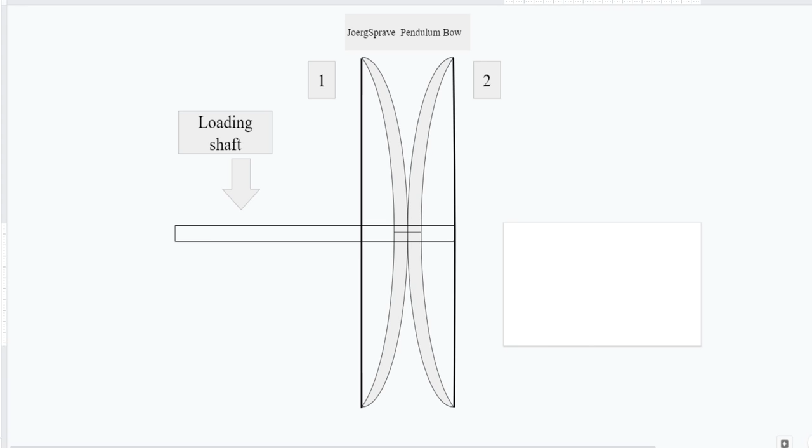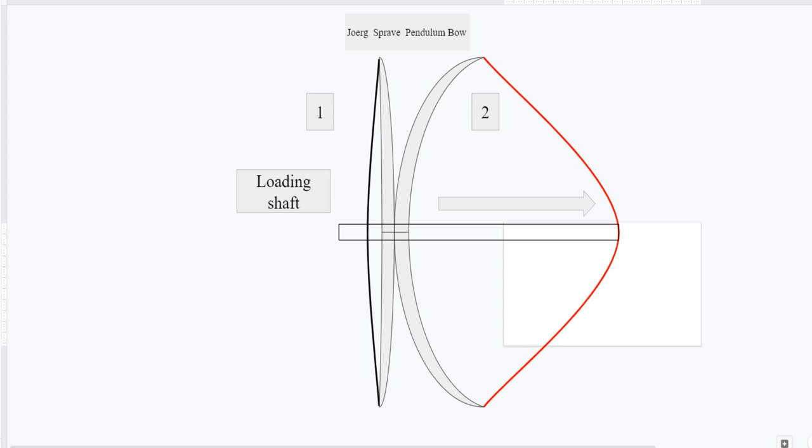Moving on, JoergSprave's pendulum bow is made up of two bows front to front, side by side, with a loading shaft extending backwards from bow 1. To load the bow, you must push the loading shaft forward, putting strain on bowstring 2, so you can be prepared for the pull back to get ready to launch an arrow. When you let go of the loading shaft, it should equalize. Both sides of the bow, 1 and 2, should equalize in force pushing inward.

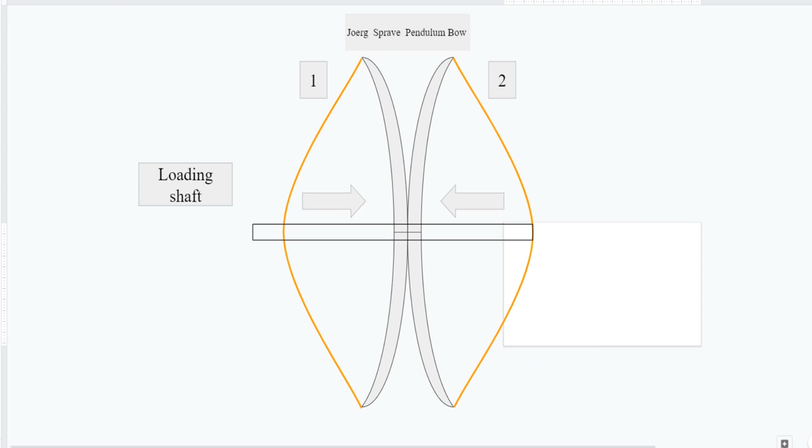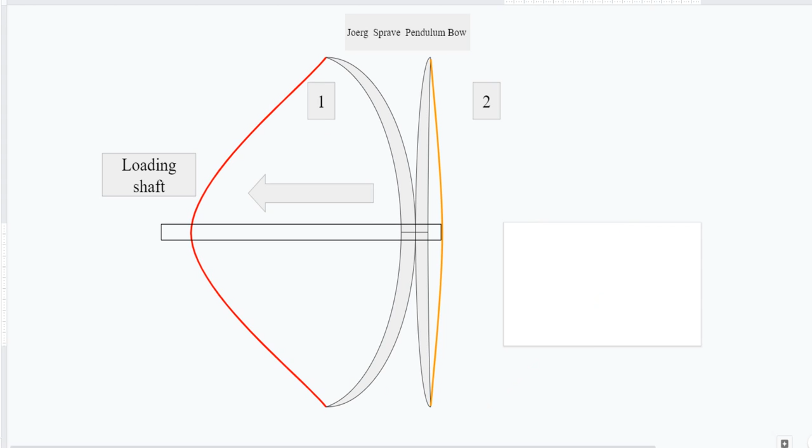So this way, it does not accidentally fire off an arrow. And this way you can relax your hand and wait for an opportunity to shoot an arrow. Now, you pull back the loading shaft on bow 1 so that way you can put strain on bowstring 1 to ready, aim and fire. Releasing the bowstring and the loading shaft should fire the arrow, and there'll be a trigger.

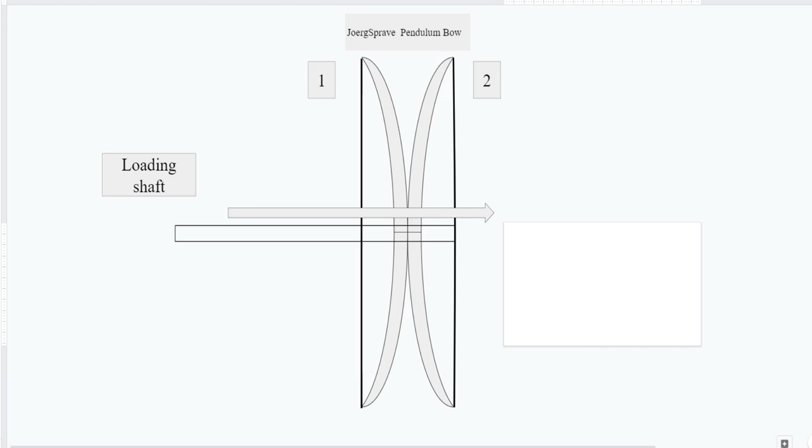It'll fire the arrow out, and bow 1 and bow 2 will be at rest, at which time you can repeat and do again, making this a lot faster and easier to pull back a 100-pound bow, which is a long bow. My idea is based upon an inverse curved, already crafted curve. So the idea is that you have a normal 100-pound bow, a long bow, and a shorter bow, just by like 2 to 3 inches, maybe 4 inches, shorter than the long bow, and it is already formed in a curve. It is not put under any stress. That is how it's made.

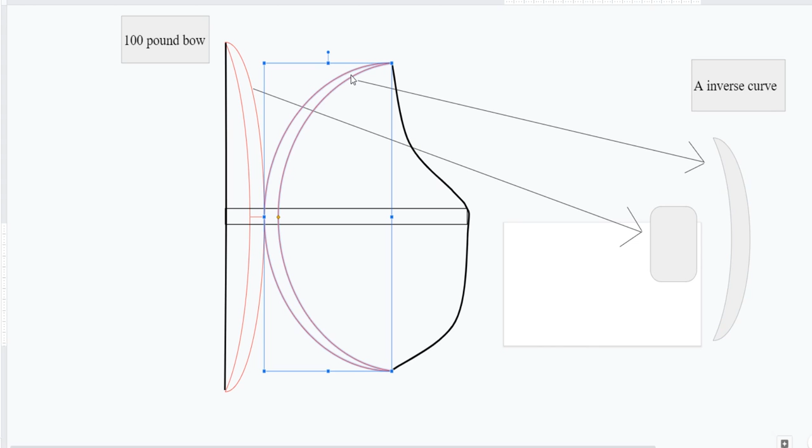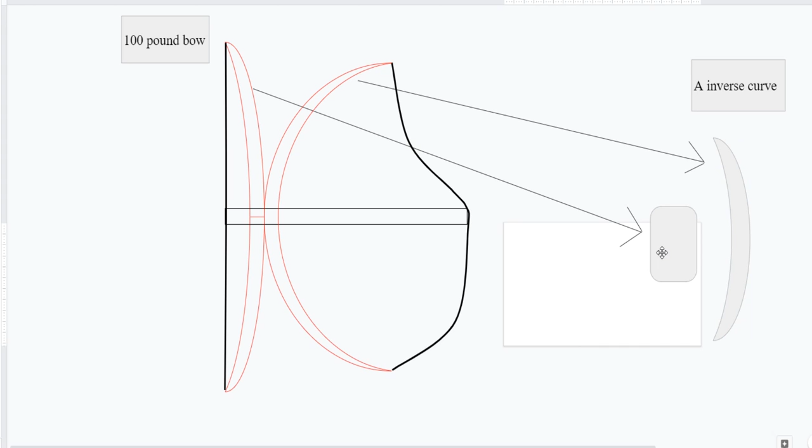It has an inverse curve, and it is already in this form. That's how you make the bow. You do not make it straight, you make it as a curve. And this will go around the normal 100-pound bow. Notice how the inverse curve and the curved bow is much wider than the 100-pound bow. This is to prevent it turning from one side to the other. You don't want it shifting from one side to the other side. You want it perfectly straight. You don't want it moving out of that position in any way.

This is my idea. So, as you saw before, it starts like this. No stress on either string. The shaft is like this. When you pull back, all the stress from this bow will push this loading shaft back into bow 1, allowing the strain of this bow to push back on this, making your pullback easier on you when you're out here and making it a little safer. This means you don't have to hold it as strong when you pull it back. When you fire it off, it should push back into its original state, at which time this bow will pretty much push off as well.

So the reason why I have an inverse curve is when it gets to a point where this bow is pulled back to a certain point, it flexes back into this form. So you are not pulling back that bow at all. That bow just tips past its flex point and it flexes back on itself like this. That way, that bow puts its own strain on its own string, and you are not basically pulling up another bow.

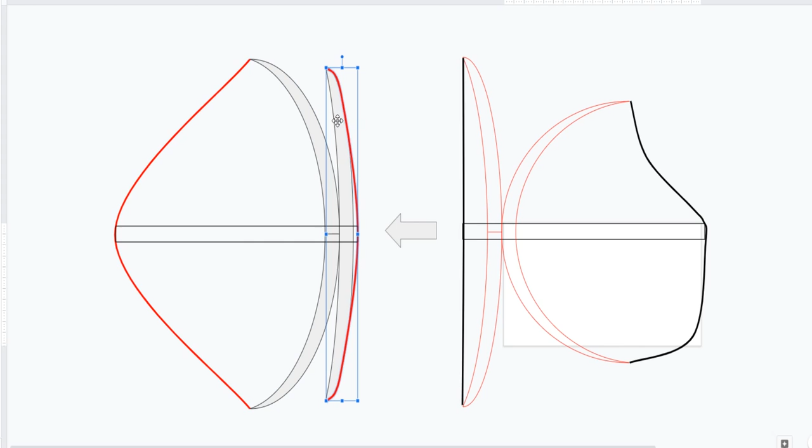That will help you pull the 100-pound bow, making it easier. When you fire it, hopefully the 100-pound bow pushes past and allows this bow to get pushed back into its original form, not changing the power load for the arrow, thus creating a compound bow without actually making a compound bow.

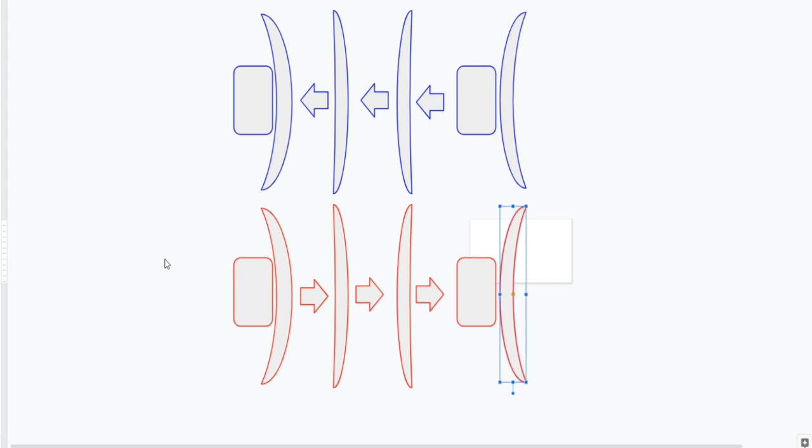Basically, let me zoom out. Basically, this is what it does. You pull it, it loads. You pull this, and it loads itself, and at this point, it flexes and immediately goes into this position. Now, when you fire it, hopefully it will launch and then push itself out of the position and into its original state. I do not know if this will work. I don't know if the physics are there, but it makes sense to me that this might work.

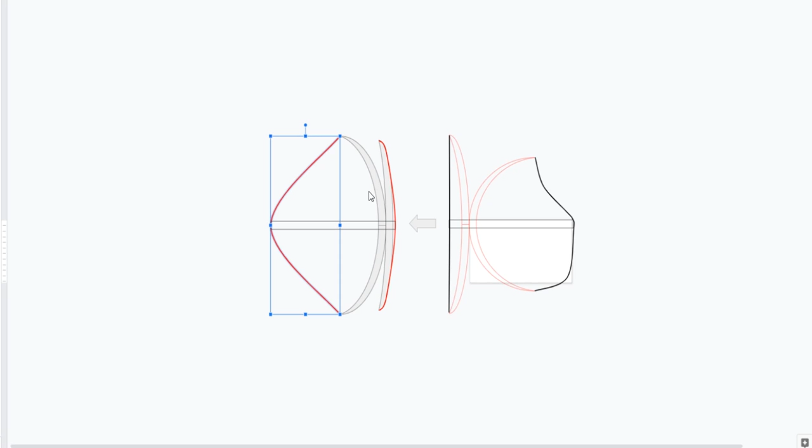Having a bow eventually flex itself, get past a tipping point, and immediately flex backwards, then when you launch it, it goes into that. That is how this and this string will work. These two strings will both be under stress. The arrow will be basically held by two strings instead of one. One string is a support string to help push it backwards, where the other string is to help push it forwards after it's launched. This way, the amount of stress you're getting is basically 80%, if not 50%.

The idea is to just pull it back, it gets past its tipping point and flexes backwards, taking the shape of a longbow, but not having the same strength as a longbow. Otherwise, you may accidentally snap the bow in the front. The string is loose. It is only tightened when it is in its pulled back position. If you were to have a tight string here, you wouldn't be able to get to this position here. The bowstring itself would prevent you. You would stop halfway and you wouldn't be able to pull back any further.

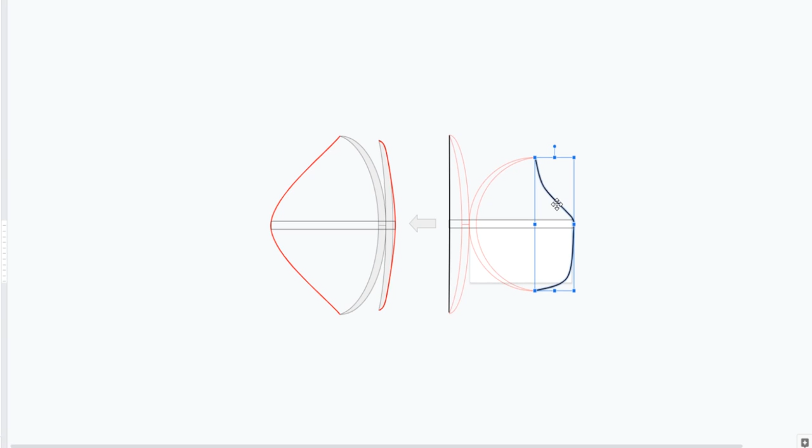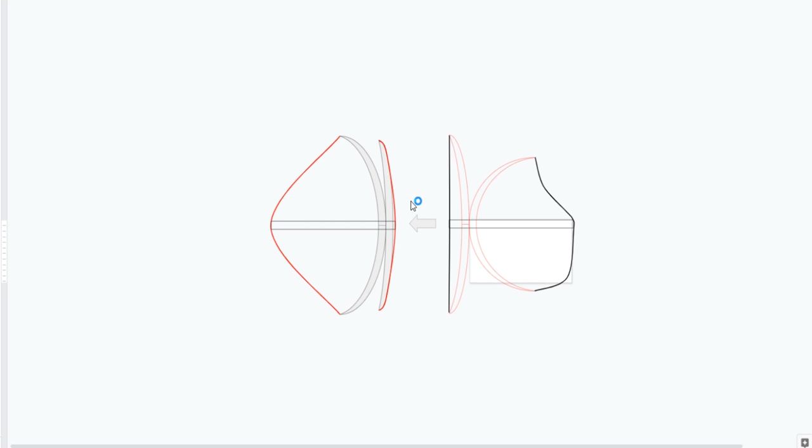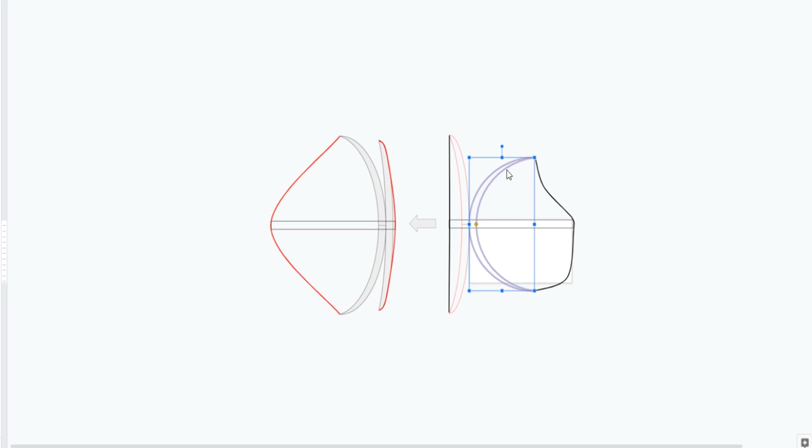So my idea is to have a loose string in the front, a tight 100-pound bow, but it's stuck like so, and then you get the idea. So this is my idea for Todd's Workshop. This method is simplistic. It can be easily produced, but it's hard to do because in order to build this bow you need a really thick tree that's thick enough to make a bow that is already in a curved form. But that is the idea for my compound bow, my pendulum bow. So this way, instead of having to push forward to load, you can just pull back and it will load itself.